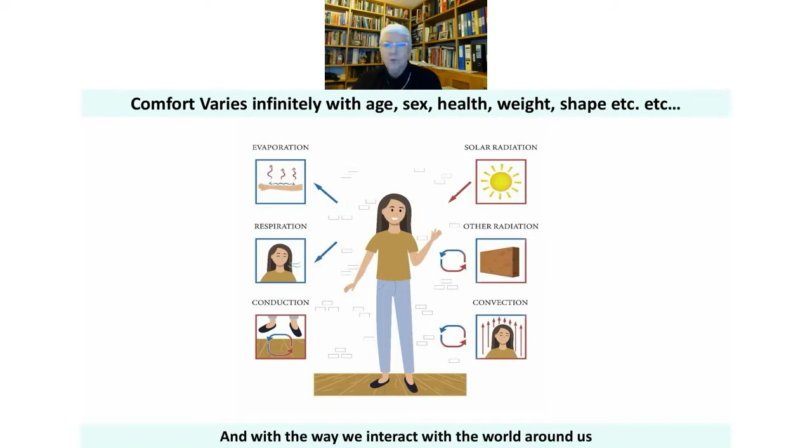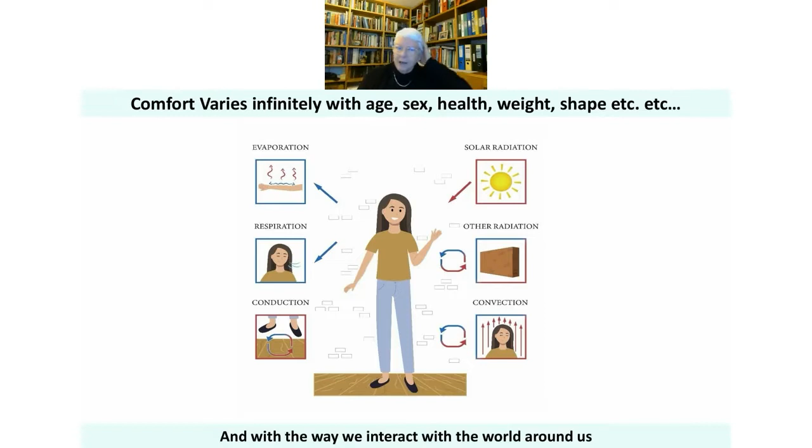Now, we use conduction when we touch a surface, a floor or a chair or a bed. We will conduct, gain or lose heat. Convection is air moving around the body, which it's continually doing, changing our physics. Radiation from surfaces, from the sun. And we exchange quite a lot of heat with the environment through respiration and moisture. We breathe out and in, which with the large lung capacity we have exchanges a lot of heat with the environment. And of course, then we sweat and evaporate. That's evaporative cooling from the skin.

And typically when it was first identified, these temperatures might surprise you. You think of yourself in a hammock on holiday by the pool, and it's blissfully neither too cold or too warm. You're in your togs. What sort of temperatures are you looking at? In fact, the earliest identification was about 28 centigrade as the lower end of the thermoneutral zone,

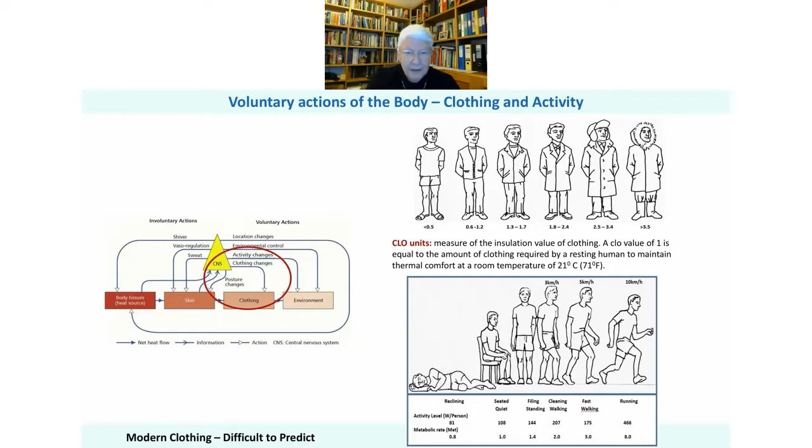And how's it producing it? It's basically turning the calories we eat into heat. So that's why if you get an international cyclist or an athlete, they know exactly how many calories they have to eat in order to be able to cycle so far or run so fast. So it's a fairly developed science, that one. There are so many variables. It really is impossible to predict comfort of an individual or a typical individual accurately.

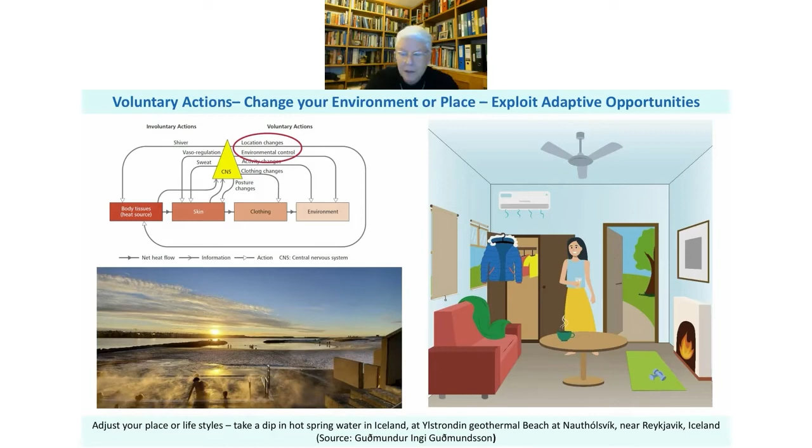So buildings are thermally landscaped, just as our planet is. So many societies will go up to the mountains in the heat of the summer, or down to the seaside, or if you want a real sensual temperature thrill, you might take yourself to the hot baths in Iceland, or take yourself skiing for the frisson of skiing in the cold air, and then going and standing in front of the warm radiant fire because of après ski. We have a number of systems in our bodies to reward us for thermal sensations as well. So that's the involuntary and the voluntary actions we can use to adapt to those places we occupy.

And so you say, well, actually, how can I decide if there is no one comfort temperature? How can I make design decisions on what systems I need, working from that? Well, funnily enough, around the world, the thermoregulatory system, whether you're an Inuit or somebody living down in the tropics, is the same. You have the same need to keep that core temperature of 37 the same.

Now, here's data from Pakistan, and look at the temperatures at the bottom. This is percentage of people using environmental controls. And you'll see that around 20 degrees centigrade, the fans are going on. The heaters are all turned off by 25. The windows are being opened, again, above 20. And the metabolic rate, the activities, are fairly constant. This is in offices in Pakistan. And again, here, that's for 18 to 35. And here again, we've got 18 to 35.

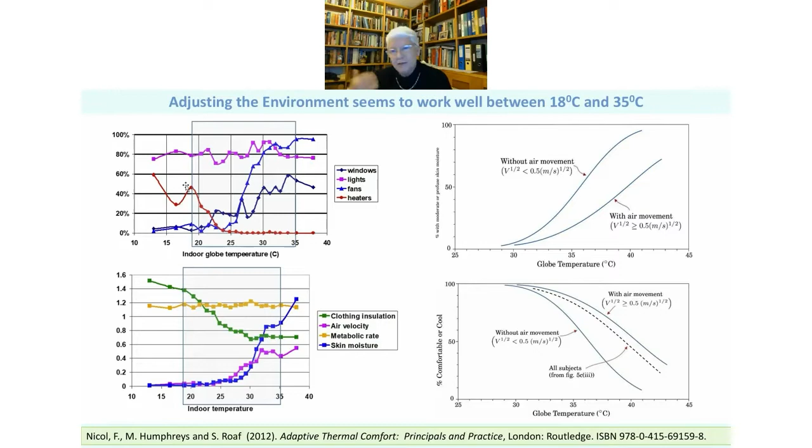You start sweating more. You need more air to get rid of the sweat. You take off more clothes. And you can see on the right here, this is the percentage of sweat on the skin from 30. That's the center of your thermoneutral zone. So you've got more sweat on the skin if you don't move it with air. And if you do move it with air, then that evaporatively cools the skin. So again, from 30, without air movement, you've got far fewer people who are comfortable or cool than with air movement, because that sweat evaporation is cooling the skin. So we have got some indications of temperature ranges for comfort.

Now, my doctorate was on the wind catchers of Yazd in Iran. Comfort is a cultural construct related to climate, and people in their everyday lives have thermal lifestyles. So here in Yazd, where you've got temperatures outside of 38, 40 above the roofs of the old town, you've got courtyards, summer rooms, basements, and people sleep on the roof. And here you can see them. They move from the hotter courtyard onto the roof, where with clear skies beneath the stars, they sleep underneath eiderdowns, and the temperatures go down there.

This is three different housewives in different houses. As soon as the sun rises in the morning, bang, they're off downstairs because it gets too hot quite quickly on the roof. And they're pottering around in the courtyard, cooking lunch, cleaning, washing, doing domestic chores. And at around 12 o'clock, it's getting pretty warm then, 37. And the whole family, the men will come back from the bazaar or work. They go down into the basement where they have a big lunch and sleep it off in the coolth of the basement. And then as the sun leaves the courtyard, the evening breeze rises up. They'll come up, spread water on the courtyard, bang, straight up there.

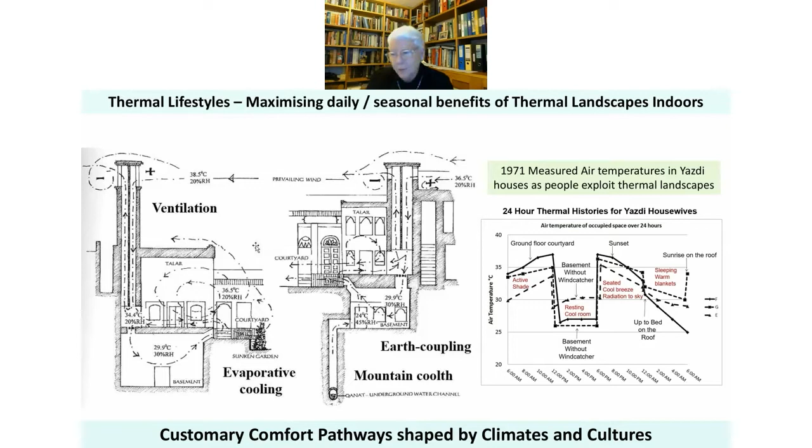And you say, well, this is nearly 10 degrees centigrade difference that they're changing here. But these are well-known customary temperatures. So this is safe thermal behavior. They know what it's going to be. The human body is rather like an energy battery. So you will deplete the energy if you go out in the cold, and then you'll go back inside to top up your energy and the heat in your body. And if it's on a safe routine, then it's perfectly fine; it's how people live in non-air conditioned buildings.

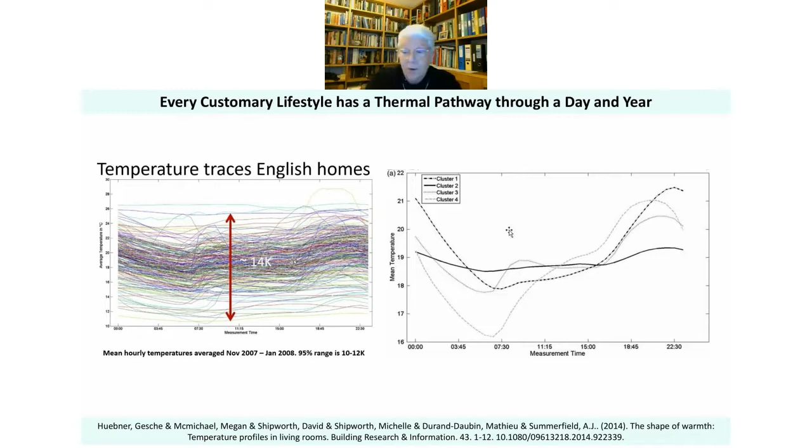And have a think about in your own home, the thermal lifestyles you lead. Anybody who's taught in Edinburgh or Scotland will know that there can be deep snow and frost on the ground, and some people who've come from hot countries will wear their anoraks into the lessons, and then you'll get a lad from Inverness who'll come in with t-shirt and shorts or t-shirt and jeans. They're accustomed to different thermal lifestyles.

How do you find out about what comfort temperatures are? Well, you can start off by reading our books. We've got a simple introduction into adaptive thermal comfort, and then we've got the complex, more sort of techie, detailed researcher's book there. And I'm just finishing the third one in this trilogy, How to Design a Comfortable Building.

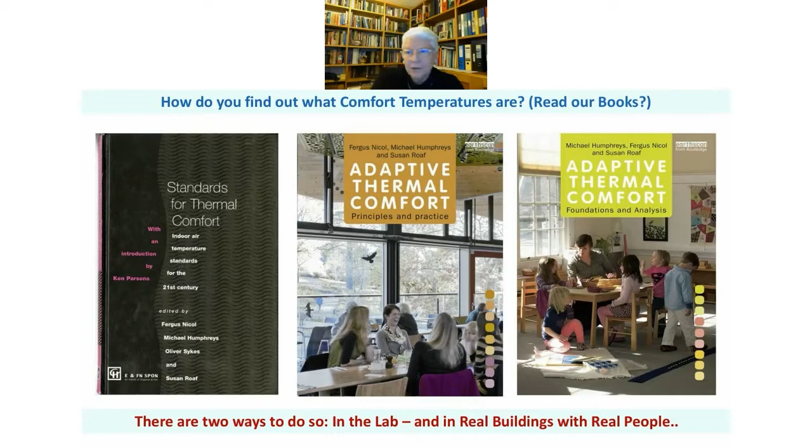Now, there are 2 ways in which comfort is researched. One has traditionally been in the laboratory, and this is the HVAC industry approach. The HVAC industry uses the outputs of laboratory experiments to develop steady state calculations, or a heat balance method. The best one known as PMV, developed by Fanger in Denmark. This work has historically been done in Northern Europe and America.

So what you do is you get people in the laboratory to see their respiration rates, etc. Most of this work is done by young college-age male students. Much of it was done in the 50s, 60s, 70s with small cohorts of typically non-diverse subjects. But from all these laboratory experiments, they worked out that human comfort is reduced to 4 basic physical parameters: humidity, air temperature, air speed, and radiant temperature.

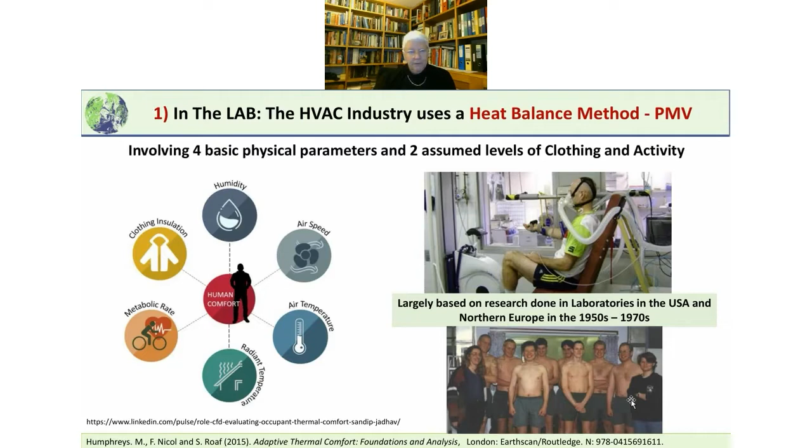And then they add 2 parameters which are assumed, which is how much clothing are they going to be wearing and what's their metabolic rate. So they put all of that into a bag, shake it out, and come out with a comfort temperature. That's the laboratory approach. And out of that, it's marvelous. We see quite a lot of research where they come out with comfort temperatures to 2 decimal points, which is marvelous.

But the HVAC industry, who write the regulations in America and largely in the UK as well, make their money by putting equipment into buildings, okay? So, for instance, using PMV standards, you can have very narrow limits. And also within the regulations and the international standards, they introduce categories like A, B, C. So do you want an office that's an A office?

So in summer, if it's going to be an A office, your big office room full of multitasking desk people, they recommend in the European standards a temperature of 24.5 plus or minus 0.5 of a degree centigrade, right? So that's 1 degree around 24.5 for summer. So it's 24 to 25.

Well, anybody who's been in a large room with many people in it, where you have got so little thermal difference across a space, I'd love to know the address of that building so we could come and investigate that phenomenon. And that's an A-class office. So ambitious developers are pushed to high-end offices with that sort of thermal limit.

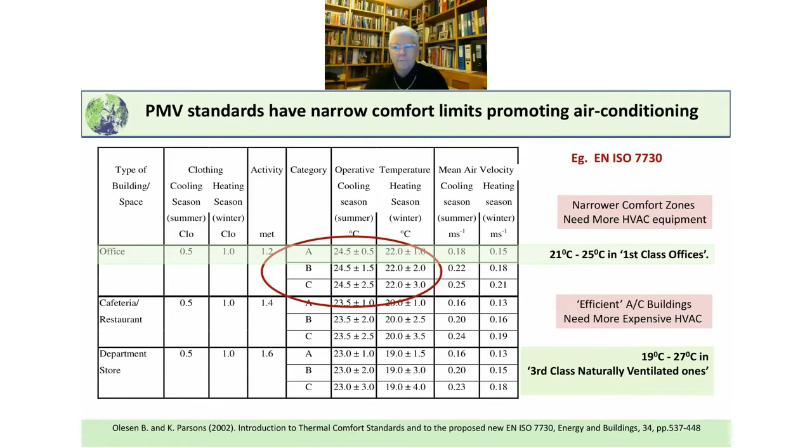So people are continually being pushed to very highly mechanized buildings through the regulations and the standards. The third class, naturally ventilated buildings, permissible under the international standards, is something like 19 to 27 C over the year. Well, we've seen that people can be quite comfortable, but we'll look at this a bit later too. So they're pushing developers away from naturally ventilated buildings.

And if you see in the United States of America, ASHRAE, the American Society of Heating, Refrigerating and Air-Conditioning Engineers, these are the temperatures in the comfort zones from 1941 to 2009 in Japan and the USA. So in 1941, 17 was perfectly acceptable in winter, 17 to 22. By 2009, even after the Kyoto Protocol, that was 22 to 24.

Well, that's pushing up. For every degree centigrade you increase it, you're using 10% more energy to heat or cool the space. So that's pushing up the energy use enormously. Japan is much more sensible, much more stable. And you see after the Kyoto Protocol, they actually dropped the required temperatures in winter.

Here in summer, in 1941, 24 to 27 was perfectly adequate. But gradually over time, ASHRAE has pushed it down and down and down and narrowed it. Because you see, if you narrow it, you have to have much better equipment, more expensive equipment. So here we're 24 to 26, I think, in summer.

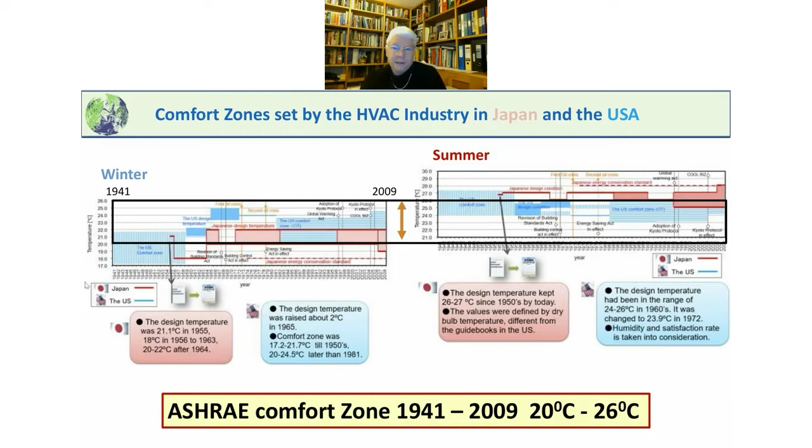So you can see the trend in the laboratory derived, and it's often fairly weak laboratory research, is used as the basis to push these international standards. There is the other way to work out how comfortable people are going to be. You actually ask them how they feel in the buildings they live and work in. And then sometimes you ask them how would they prefer to feel. Sometimes it doesn't actually correlate. They'll say they're very hot, and then they'll say they want it hotter or something like that.

But these are two scales. The ASHRAE scale, it's a 7-point scale, basically, from cold to hot, with neutral in ASHRAE in America as naught, and comfortable on the UK Bedford scale, much too warm, much too cool.

You know, Britain led the world in comfort research in the early 20th century, not least because they had the biggest empire. And you found that if you put people in the tropics in bearskins and woolen uniforms, they had a tendency to fall over on the parade ground, which is inconvenient. So a lot of research went around military comfort or survival in military situations or in industrial ones.

A lot of the work was done in deep mines in South Africa, 2-mile deep mines, where they put people down to work 8-hour shifts in 40, 50, 60 degrees centigrade. And when they started dying, they decided they needed to know more about comfort.

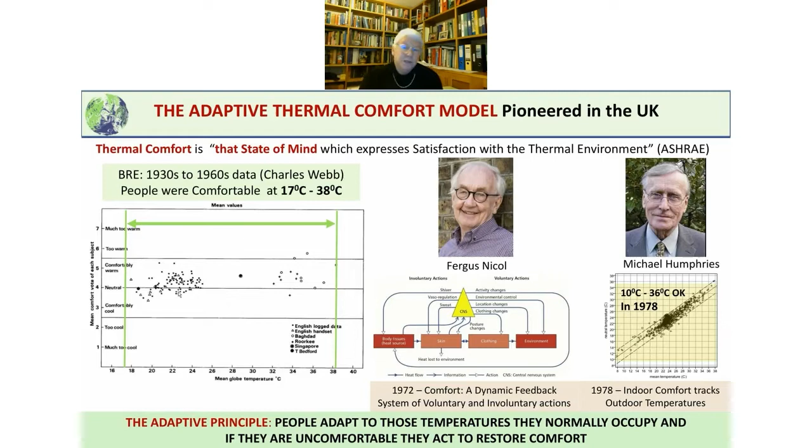People are comfortable at the temperatures they normally occupy, and if they're uncomfortable, they act to restore their comfort because they have to keep that core temperature thermally safe. Mike Humphreys was head of human factors at the BRE. Fergus Nicol worked with him and then at the Medical Research Council and came up with this lovely diagram of the very dynamic feedback systems that are going on all the time, subconsciously mainly, for all of us, keeping us thermally comfortable.

And now, in an adaptive thermal comfort study, you study real people in real buildings. And you note the use of controls like windows, blinds, and so on. You measure the environment: temperature, humidity, airspeed. You note the clothing they're wearing. And you ask them, how are they feeling?

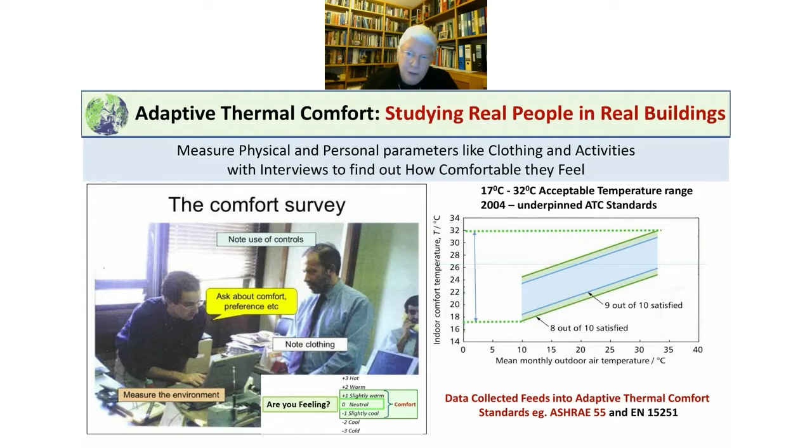And through, actually, it's now hundreds of thousands of data sets we have from around the world, temperatures around the world, you can then plot it and use statistics to predict when 9 out of 10 people or 8 out of 10 people are going to be satisfied. Again, following that same principle that people adapt to those temperatures they normally occupy. And this is work done in Berkeley, California, where they've done some fantastic work, Gail Brager in Berkeley and Richard de Dear in Australia.

If you're working in an air-conditioned building, the observed field-based and the laboratory predictions match. You adapt to those temperatures that are predicted by the laboratory. If you go into a naturally ventilated building, the laboratory predictions will give you a very different picture of the indoor comfort temperatures, because people adapt to those temperatures that they experience.

The existing PMV, the steady state calculations, are really inaccurate for anything that's naturally ventilated. They predict that you're going to need a higher temperature to be warmer in winter and a lower temperature in summer. So that means you need more air conditioning there, and more heating there.

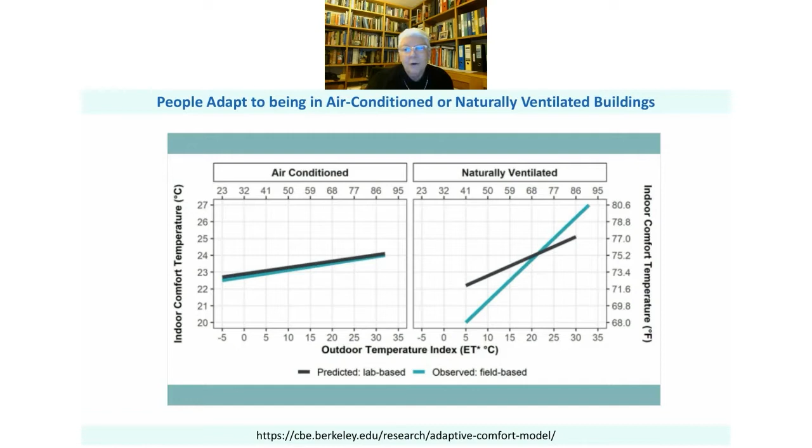So this is the climate reality. Indoor comfort temperatures are directly related to outdoor temperatures, and using statistics, one can develop algorithms that are then fed into controls or used to predict roughly an adaptive model for what temperatures people will be comfortable at.

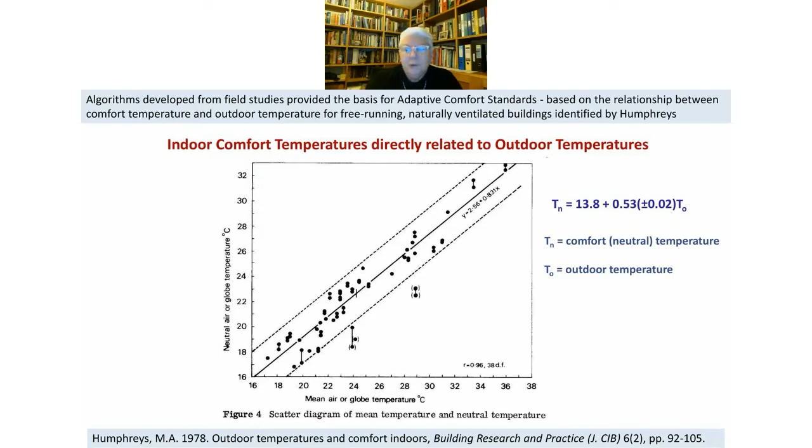And for instance, in Holland now, they have an adaptive regulation, which basically says between 18 degrees centigrade and 28 degrees centigrade, that's a fairly safe thermal space. So you really don't need to worry unless it's rapidly changing. If it's a stable temperature in summer at 27 and in winter at 18, you can use other adaptive, what they call personal comfort systems. Put on another jumper, foot warmers, fans on the desk in summer, and so on.

And here's where we're getting into the land of the comfort clouds. So when you statistically reduce those vast data sets to regression lines, you're taking away the richness of what you can find out from the spreads of data. So here we have naturally ventilated buildings, globe temperatures, and we assume that if people are living in these temperatures, they are acceptable to them.

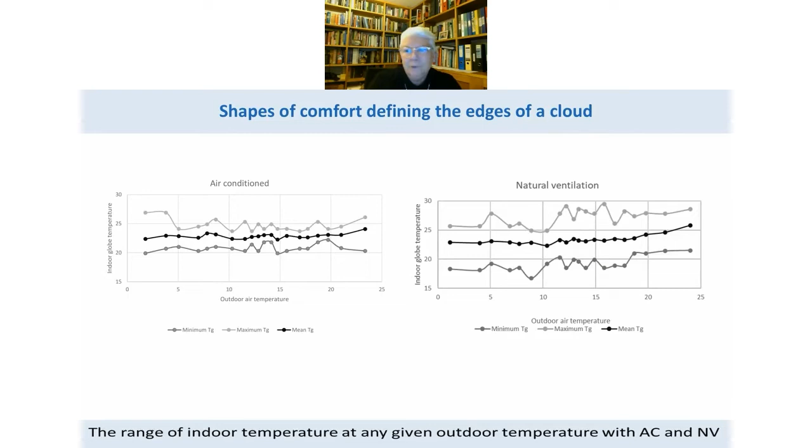So with air-conditioned buildings, you've got very narrow indoor temperatures, and here you can go from 30 to 17, 18, with quite a variety, and people not reporting discomfort. But when we said that comfort is cultural, we've got some wonderful data, 4,700 surveys from France, Portugal, Sweden, and UK. And a cloud of points is formed. This is Fergus's comfort clouds.

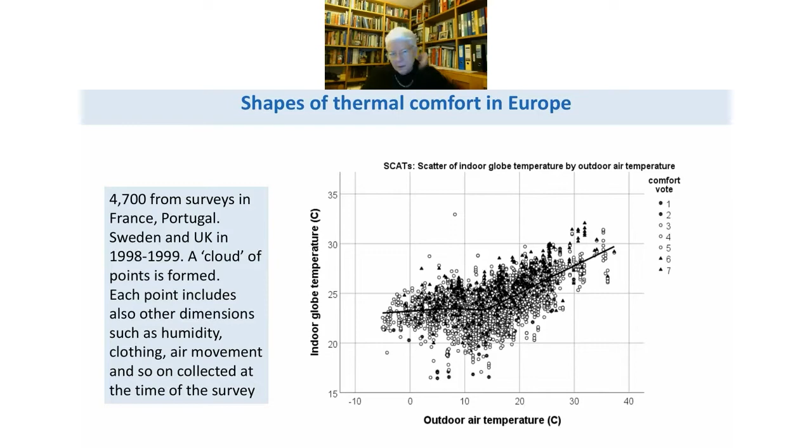In each point, you'll have a lot of detail on air movement, clothing, humidity. So Fergus spends a lot of time playing with his data. But what's really interesting is the cultural differences. So if you see here, this is Sweden. In Sweden, where they're largely fixed windows with heat pumps, year-round air conditioning, the temperatures are invariably 20, 21, 22 to 25, because they are fully conditioned. Sweden is a much colder climate. So they have now got a fully conditioned culture.

Let's take another one, France. France is rather good. It's bimodal. In winter, they heat their buildings, and in summer, they throw the windows open. And here we have a shape. So the hotter it gets, the higher the comfort temperatures in naturally ventilated buildings.

And here we have Portugal, which is a hotter country still than France, but they don't do heating very much at all. They just rely on naturally ventilated buildings. And of course, in the old days, they'd have a small heater under a table with a blanket over it. But actually, people in winter can get quite cold in Portuguese traditional houses. But that's just fully naturally ventilated.

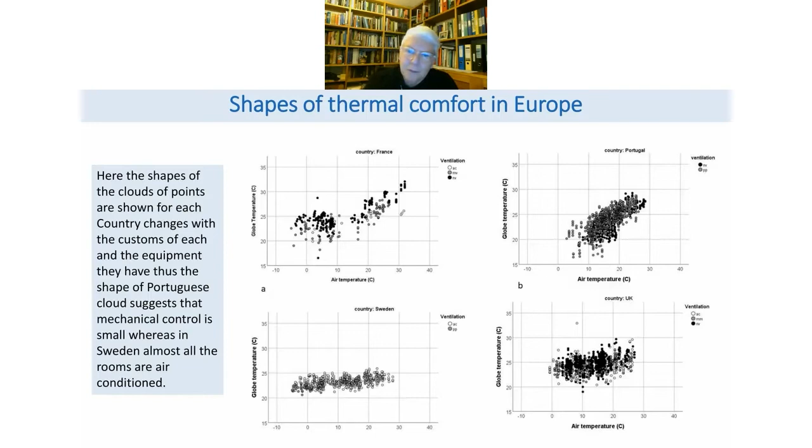And in the UK, it's an absolute basket case. You can't tell what's happening. It's neither, but you've got that naturally ventilated Portugal, bimodal France, and fully air-conditioned Sweden.

And if you go looking in hotter countries, this is work we did in the 90s in Pakistan. We've got Saidu Sharif up in Khyber Pakhtunkhwa. We've got Peshawar on the plains above Islamabad. We have Multan, which is a continental desert climate. We have Karachi, which is on the Indian Ocean, a maritime climate. And we have Quetta, which is the highest of them all and the coldest of them all.

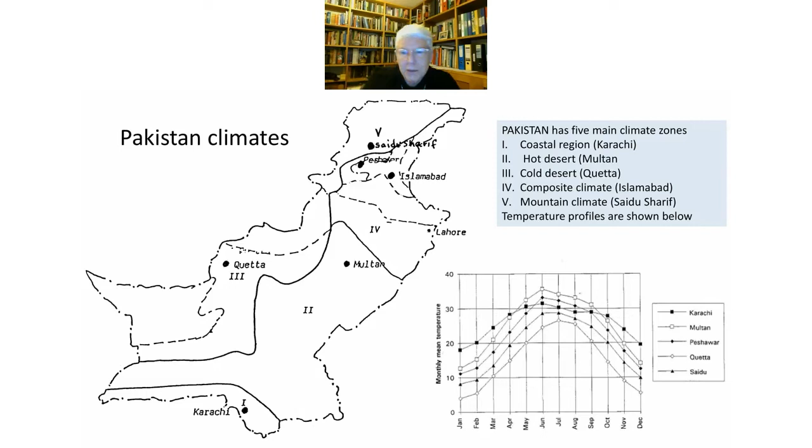And so you see, if we take Quetta here, that's the temperatures over the year in Quetta. And then this is the maritime climate, Karachi, much lower variation. And then Multan, we get the full continental climate, which is shown in the temperatures and reflected in the shape of thermal comfort in Pakistan. So we take Multan, which is the continental desert climate. People are quite comfortable or live in temperatures, they seem to be quite outliers, but going up 35, 40.

Whereas in Quetta, which is very high, up by the Afghan border, we've got people living in temperatures of 10 and so on. Saidu Sharif, which is the montane climate, is cold, but less variation than Quetta. So you see, the temperatures people occupy are dictated by the climate.

And very often you get the scientists or the laboratory researchers, who've been working all their lives in a Danish laboratory or somewhere, and they say, but are they really comfortable? They couldn't possibly be comfortable at those temperatures, because they've probably lived in that sort of Swedish air-conditioned environment their entire lives. So they cannot sensually or intellectually comprehend that people have very different thermal cultures.

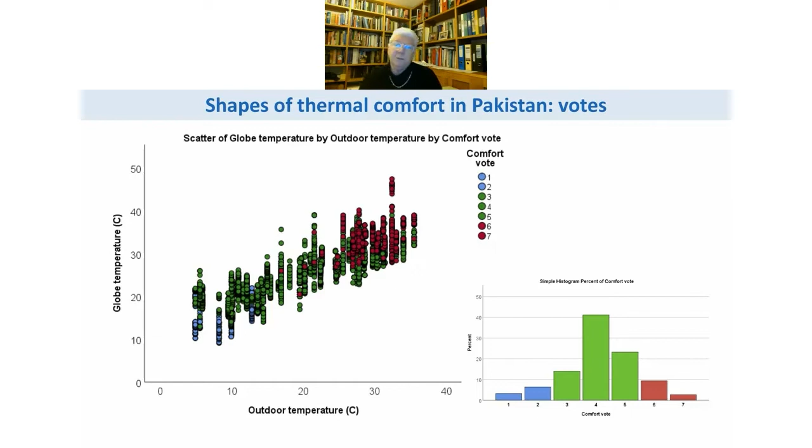And so here in Pakistan, we're getting above 40. People are hot. They are living in hot conditions there. And people get cold in Quetta. And then you've got, say, a band here of general responses. But for a range between 10 and 40, say, you've got the comfort votes. There's surprisingly little at each end there. But now this is important. This is the link between comfort and climate.

So you go to Multan, which is the desert continental climate, and you've got 80% of people reporting themselves as really comfortable between 22.5 and 35. Now, if we go to Saidu Sharif, the montane climate, there's 80% of the people who are comfortable between 15 and 30. So while the average data will show you a histogram a bit like that, in reality, every

city is different. So Glasgow will be very different from Edinburgh in terms of their thermal responses. Inverness will be very different from Aberdeen and Oxford or London. It's because people have adapted using involuntary and voluntary acclimatization and adaptation practices and cultures to adapt to those temperatures they normally occupy.

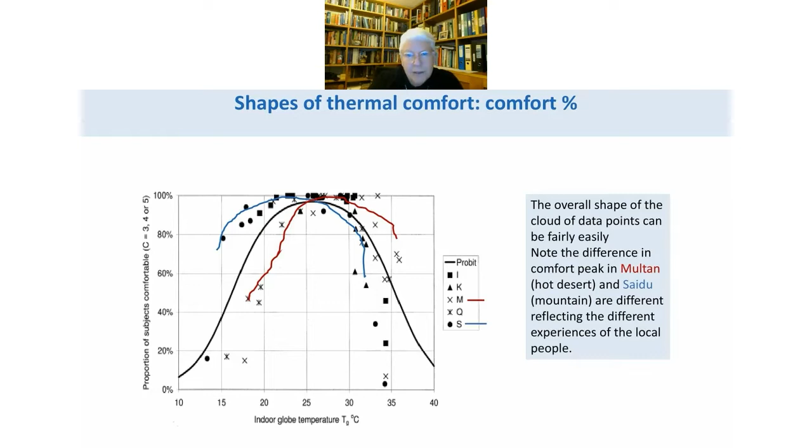If you say to somebody, what humidity is it in this room, they will inevitably get it wrong. And one of my PhD students in Dammam on the Gulf did this quite extensively. And people in the Gulf, where you're supposed to have this hugely high humidity, really had no idea what humidity they were living in. So these people who say, oh, you're going to die when the temperature gets to 35 and it's 100% relative humidity. Well, it's never 100% relative humidity for long.

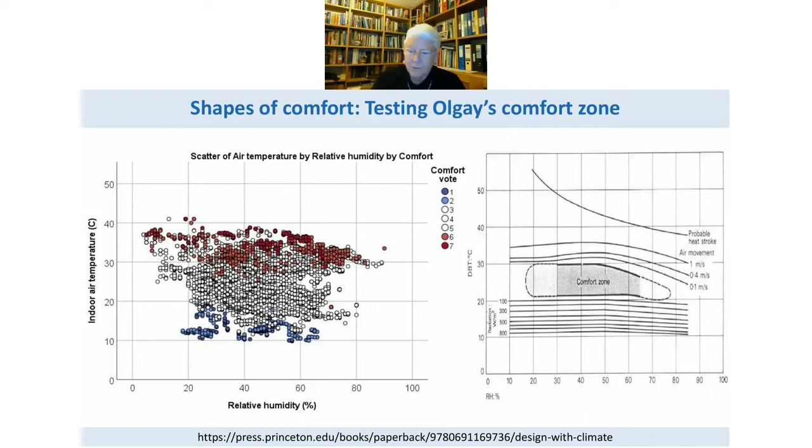It's like people can work in yurts in Siberia herding the sheep for an hour in minus 20, but then they go back into the tent and warm up by the fire. You've got a lot of leeway in how much time you can spend in the most extreme conditions. So sometimes you hear an awful lot of guff being spoken on the BBC. Look, head in the clouds, thermal comfort conclusions.

So what you have to do is, if you want to design for a new climate, first thing you do is you go and look at the vernacular architecture of that place, because that will tell you how much wind they want, how much mass you need, what orientation is best, etc., etc.

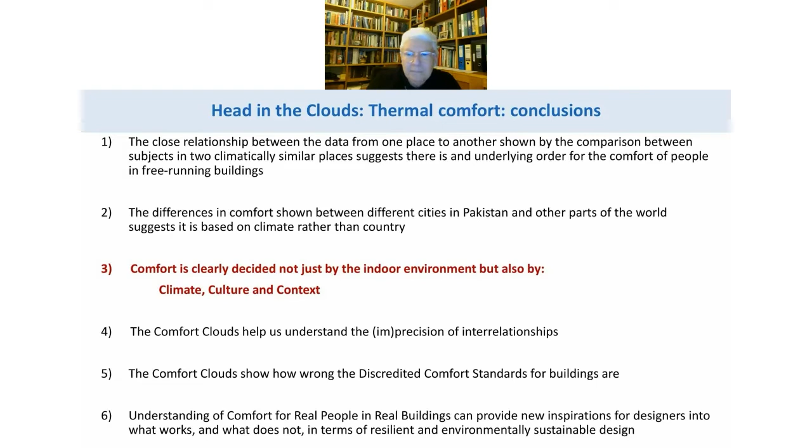And this isn't a backward step. This is going to provide inspiration for really good designers. It's going to be liberating not to be tied down to the diktats of an engineering profession who really are basing the move to ever tighter comfort zones on very poor science.

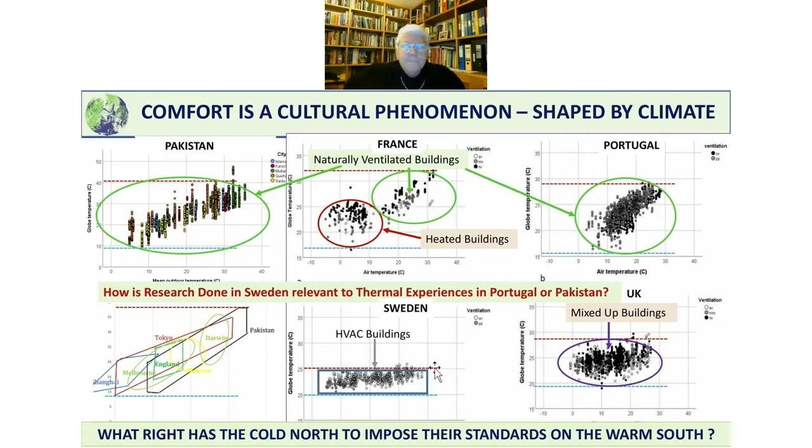So look, my question here is, why should people in Sweden who are writing the international comfort standards dictate what temperatures people ought to occupy in Portugal or Pakistan, where they have no understanding of the conditions that people are comfortable in? But that's what's happened. This is the international style of architecture, which is why in the Gulf you get billions of dollars of wasted money with overcooled buildings.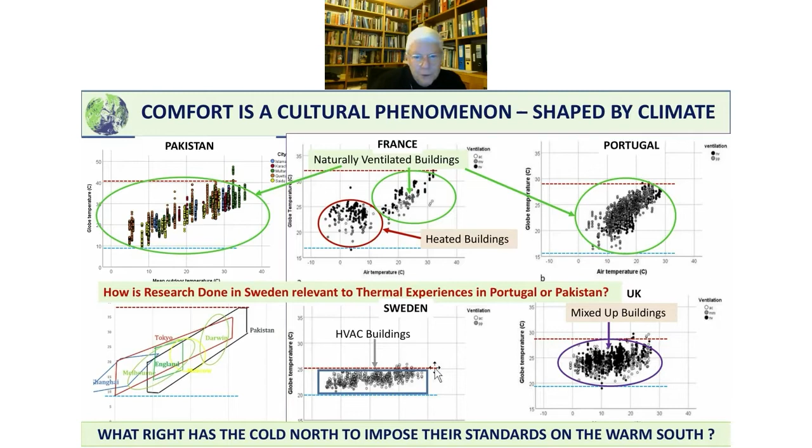And you get that around the world anyway. Now, here are the comfort clouds. You see, we've got these comfort clouds. Darwin in Australia, Pakistan. These are the English clouds. Tokyo, Shanghai. They get very cold in Shanghai. Melbourne. I mean, any city can have its own comfort cloud, which will help designers understand how to design.

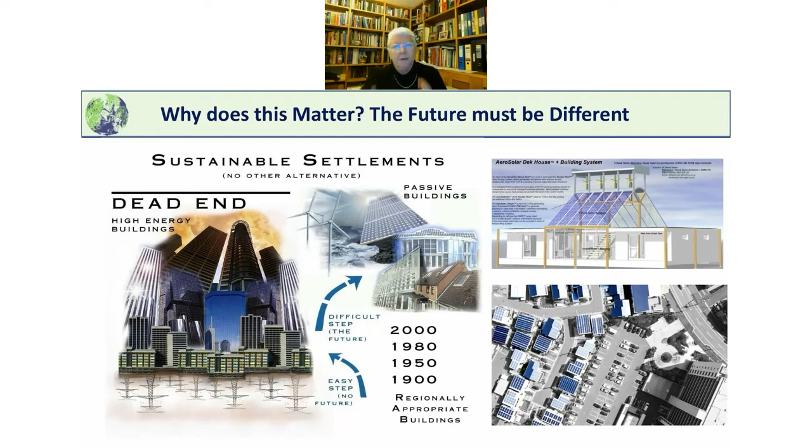Now, listen, why does comfort matter? Because the future is different. We've gone up this sort of dead end. There is no future in a heating world for shut off, fully enclosed buildings. We have to find a way of making a world that can run on clean, renewable, local energy, because otherwise very many of us won't survive.

And what is really fairly dispiriting is that we've known from the 90s. This is work by Bill Bordass in the early 1990s, the ECON 19 study looking at the energy used in buildings. These are simple, traditional, naturally ventilated high mass buildings here. Good practice and typical. These are 1960s naturally ventilated, lighter weight buildings. This is standard air conditioned buildings in the UK in the early 1990s. And these are high-end, big glass towers.

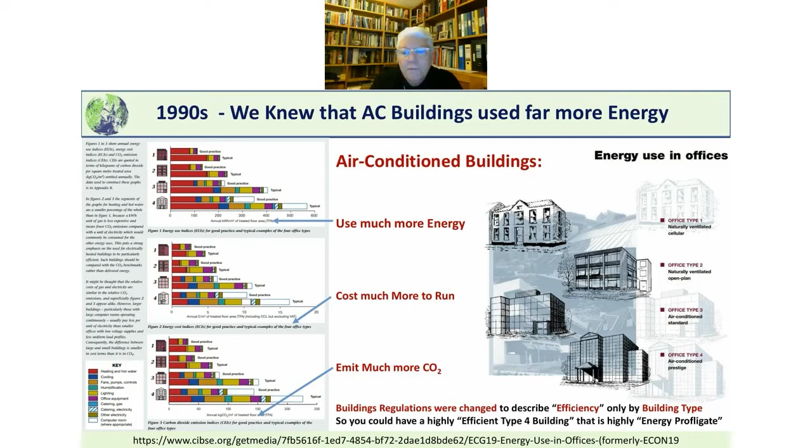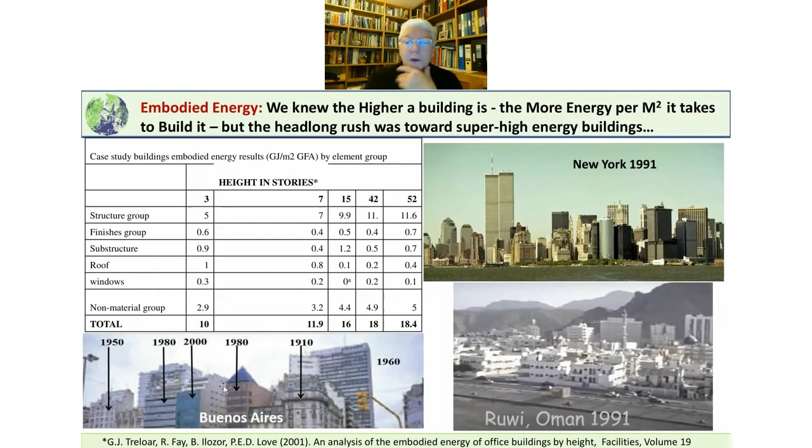Simply, they use much more energy, they cost much more to run, and they emit so much more CO2. So a really high-end big glass tower will emit 4 or 5 times more to do the same work per square meter of floor. And every time you go up another floor, you're using more energy just to build a square meter too.

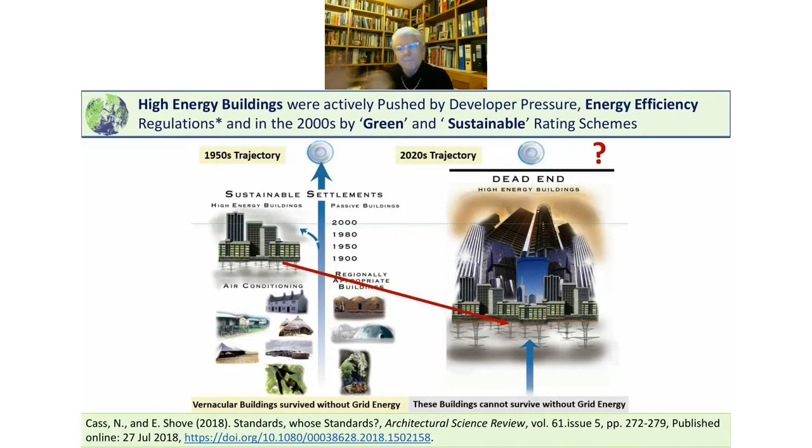I mean, I was born in 1952 into a world of ordinary buildings. And then suddenly by the 60s and the 70s, with the development of lifts and air conditioning and these building regulations, and here's another very good article showing how the building regulations are pushing into ever more mechanized buildings. But this is a dead end and it's killing the planet.

And yet we get all of these green rating schemes. This is the American LEED rating scheme. These are all platinum buildings. You cannot get a platinum LEED rating, or you could not when it was started, without having full centralized air conditioning and all the windows closed. And I think that is shameful.

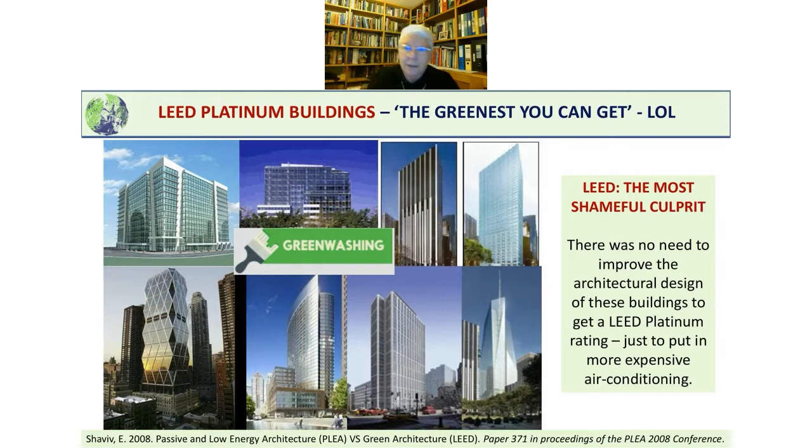In Britain, we have BREEAM estimates. The designers say, oh, it's going to use this much gas, this much electricity as they do the models. And then we have more advanced models, design estimates. That's a rating scheme by the BRE. By the way, the current building regulation committee is now chaired by the head of the BRE Buildings Division. And they peddle these green rating schemes, which are completely erroneous or produce spurious results.

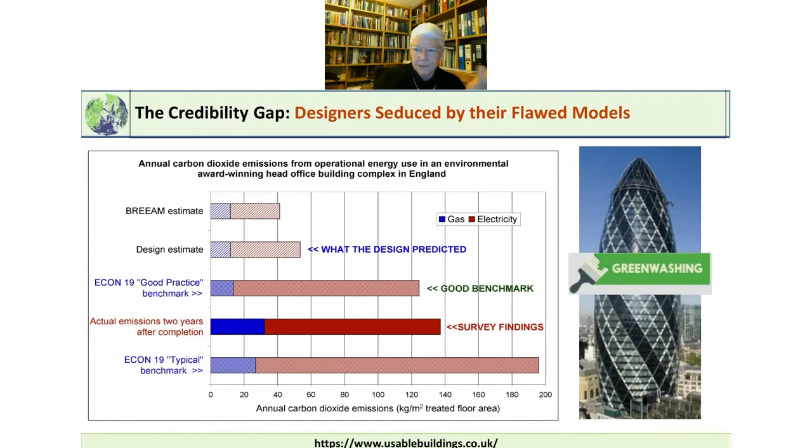Oh, it's going to only use this much. In reality, you saw the ECON 19 benchmark for good practice and typical for high-end buildings. I think this is the Gherkin. And actually, it's not even good practice they're producing. And they're still building hundreds of these glass towers in London, not least because some of the people who decide on them in the planning committees in London are even developers with property interests in the London property market, and they're allowed to sit on the planning committees that make these decisions.

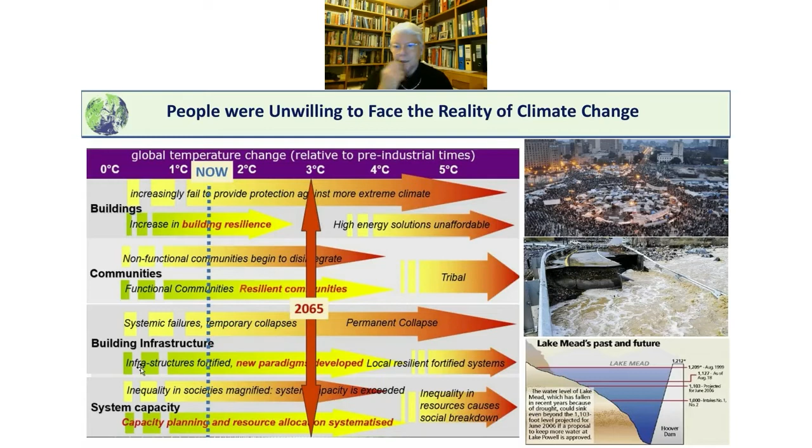Even in 2008, they were opening 7 new golf courses in Las Vegas, while Lake Mead was plunging to unsustainable limits. They weren't willing to listen before. People are much more willing to listen when extreme weather events affect themselves.

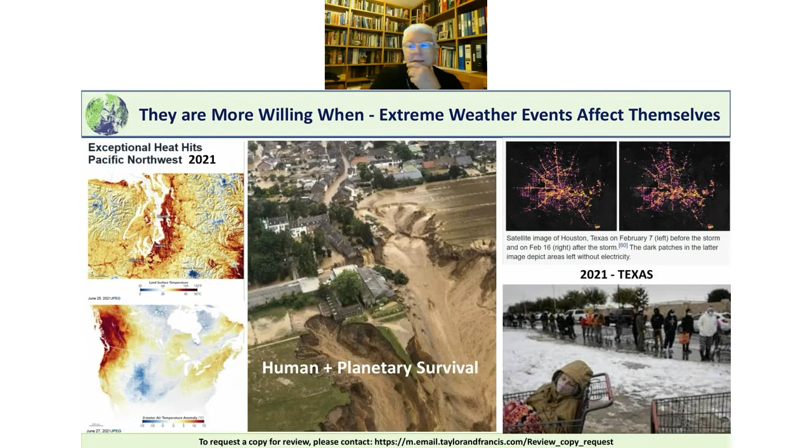Floods in Germany, the heat dome in the Northwest Pacific in 2021, Texas, the ice storm in February the 16th, cutting out electricity across a whole lot of Houston. So you've got freezing buildings and you've got no grid, and that's another thing that's happening too. And something we've learned with the pandemic, nobody is safe until everybody's safe.

And the scandal is that 40% of global electricity emissions come from some buildings. They don't come from all buildings. They don't come from these buildings. They come from these buildings, occupied by these people, the top 20%, the top 10%, the top 5% in the world, right?

And here we have the phenomenon of the disappearing middle classes, where incomes, that's the top 20%, right, may keep their head above water as we go forward into global economic crisis again. This is what happened in 2010, and this will be even worse now. So the bottom 80%, they can't afford.

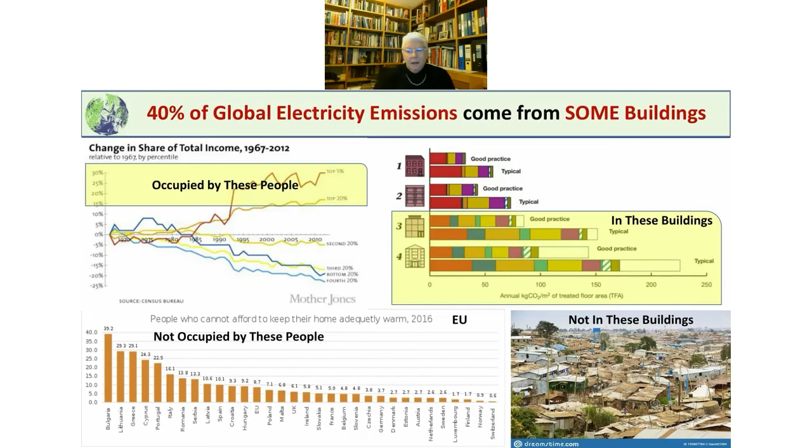This was in 2016, people who cannot afford to keep their home adequately warm in Europe. In Bulgaria, 40%. The UK, 6.1%. Well, that's going to be what, 30–40% of homes now, with the doubling and the tripling of energy costs. Comfort is extraordinarily important to the building of resilient societies.

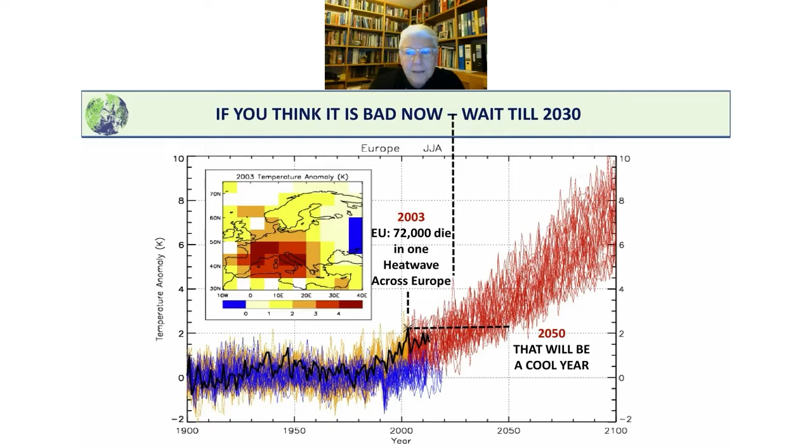Here we have the 2003 heat wave. That was an outlier. 72,000 people died across Europe in that heat wave. By 2050, that is going to be a very cool summer.

Comfort, clouds and climate. At the heart of the way forward to resilience in the built environment is to mandate that all buildings must be run for as much of the year, the day, the season as possible on free local energy. They need to avoid overheating and provide thermally safe spaces. They need opening windows. They need very good, locally appropriate climatic design. All buildings should now be designed for local climates using adaptive thermal comfort standards.

For more information, do see some of our books on adapting buildings and cities for climate change, benchmarks for sustainable buildings, eco-house design, and energy efficient building, which we wrote in the 90s. It's basically passive house, but that's 20th century thinking. The noughties was about sustainability, but nobody knows what that is anyway. It's a bit of a fudge. The future has got to be about resilience, about how to keep people safe when the lights go out.

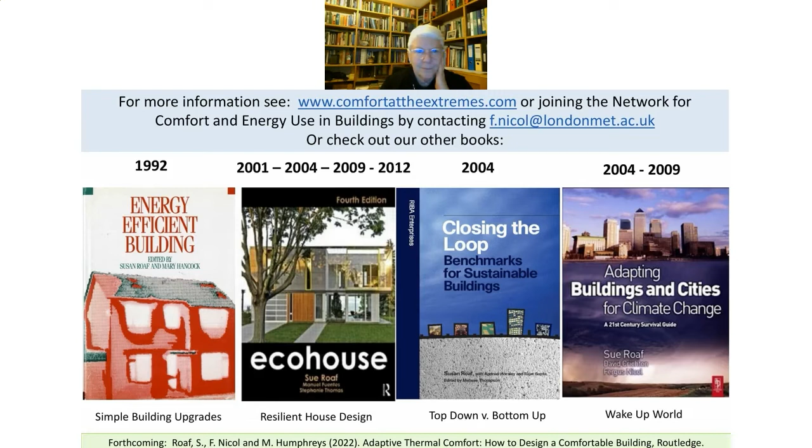Is that all right? Gary, I think you've turned off a... Right, sorry, yep, there we go.

Thanks. So we'll take one last question from Shane, who's saying that hermetically sealed buildings are not the answer. And I think a lot of architects do realise that now. And asking, are you involved in the future development of this area with the Scottish Building Standards Agency? I've been in touch with them over the years, but we have also, if you go to the Comfort at the Extremes website, on the 5th and 6th of September, starting with a big party in Edinburgh Castle on the 4th,

we've got a 2-day conference where we have the world leaders coming from America, from Austria, from Australia, from Japan, around the world, coming to look at the future of standards and air quality in buildings. So don't forget COVID, the real scandal about so many modern buildings where you cannot even open a window. We have this in Scotland, the Queen Elizabeth University Hospital.